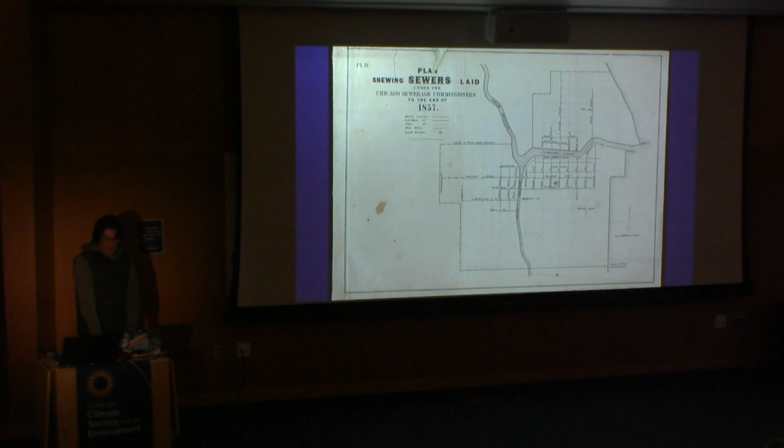In 1850, the population of Chicago had grown to over 28,000 people, more than 6 times its size just 10 years before, and this growth was rapidly increasing. So much so that the Chicago Board of Sewerage Commissioners deemed digging into Chicago's soils to install a network of pipes underground would be too expensive. There's a blueprint of the plans there in 1857.

At the time, they concluded that building a sewage and stormwater piping network above ground would be most practical. This engineered system would then let gravity carry sewage and stormwater from the city to the Chicago River. They then raised the city's elevation to sit above the new pipes. The plan? They dredged the Chicago River and used the fill to raise the city 10 feet. The challenge then was to raise the city's existing buildings to meet that new elevation.

They used an engineering method or practice called the Pullman method, which is exactly how it sounds. They would place the foundation of a given building on jacks that would then be turned in unison, slowly raising those buildings. So you'd look out your window in Chicago in 1855 and you'd see upwards of 600 men each turning their jacks a quarter of a turn at the blow of a whistle. Soon enough, the city was 10 feet higher and the streets were much drier.

But as Chicago grew, so did the water problems. By the late 19th century, rain events were bringing more pollution than ever to the Chicago River, and Lake Michigan's water quality was deteriorating. So the Chicago Board of Sewerage Commissioners put their engineering hats on again, this time developing a plan to reverse the Chicago River and send the city's raw sewage and stormwater south, in what eventually would become drainage to the Mississippi River.

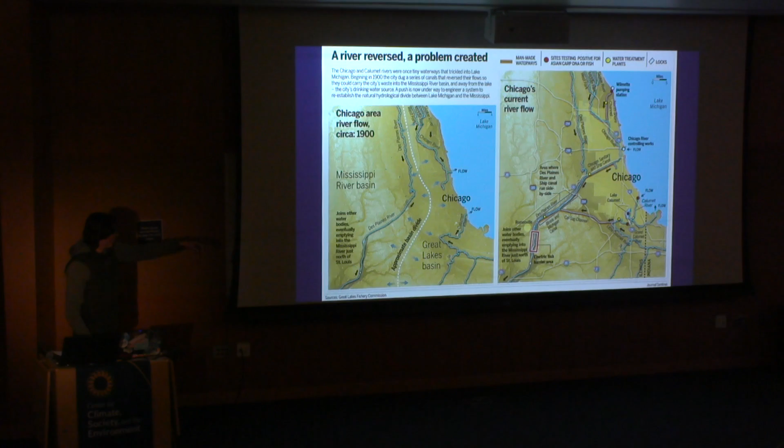As you can see there, the water flow on the left flowed into Lake Michigan. You have your approximate continental divide, and they trenched all the way down to the Des Plaines River there. Quite wild.

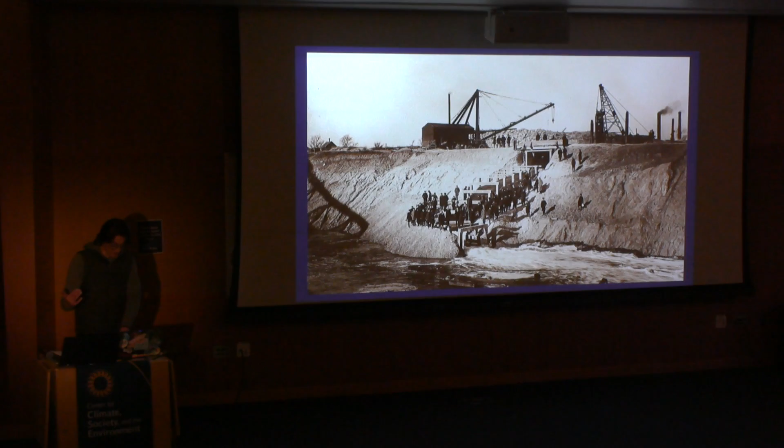In 1892, the Big Ditch, as the project was referred to, began construction. Thousands of laborers used new inventions like the steam shovel and dynamite to excavate 42 million tons of rock and soil to redirect the Chicago River's flow from Lake Michigan to the Mississippi.

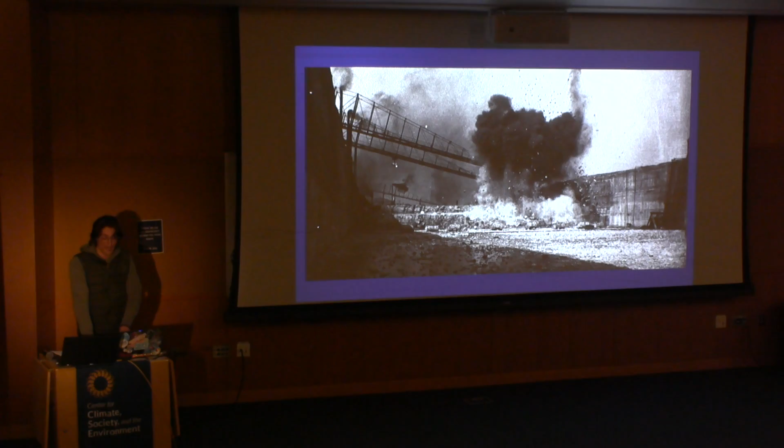Understandably, downstream communities were not happy with the resulting pollution. So the city of Chicago ran propaganda promoting the engineered project as safe, with slogans such as, "The solution to pollution is dilution," stating that the purifying qualities of Lake Michigan would make that water safe. Chicago knew they had to finish the project before they faced downstream lawsuits. And on January 1st, 1900, the city completed its final dig at the end of the project site, forever redirecting the flow of the Chicago River from Lake Michigan to the Mississippi, ultimately saving the city's main source of drinking water while preventing catastrophic flooding.

I'd now like to forward us to the Clean Water Act of 1972. The federal government made clear the need to focus on regulating the discharge of sewage and stormwater from cities' underground piping into main bodies of water.

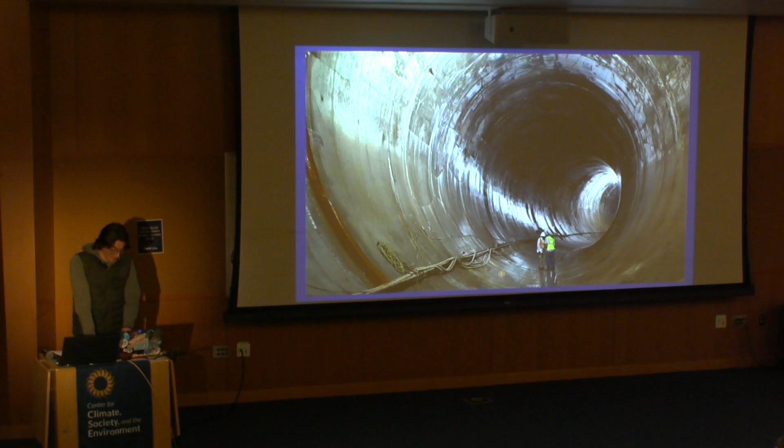The new mandates led city engineers to think big again, as the water pollution problem had become one of the worst in the nation, as Chicago had now grown to over 3.3 million people, making it the second largest city in the US and 10th in the world. Chicago embarked on one of the nation's most ambitious and expensive infrastructure projects to date: the Tunnel and Reservoir Project, also known as the Deep Tunnel, a massive storage system that will be able to hold 20 billion gallons of water once completed.

This project was signed into action in 1972 and is set to be finished in 2029, making this a 57-year project that has yet to be completed.

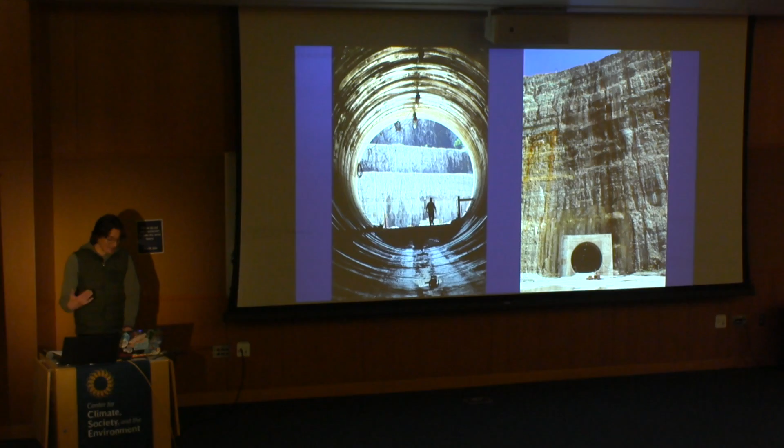The solution made sense at the time because Chicago's sewage still functioned within that same combined system developed by the Chicago Board of Sewerage Commissioners, a combination of sewage and stormwater pipes underneath the city.

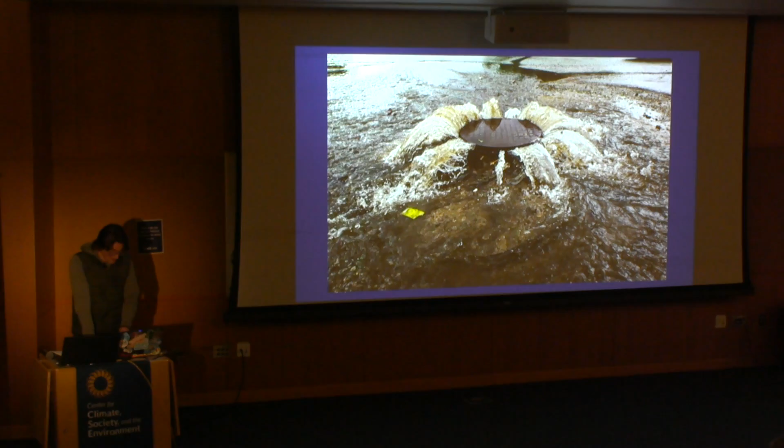Currently, just 1 to 2 inches of rainfall can overwhelm this network, forcing sewage back through the pipes to where it came from. When this happens, a combination of sewage and stormwater flows into city streets and residents' basements in what we know as urban flooding.

If there is still too much strain on the system, the city opens its floodgates, once again pouring a mixture of sewage and street runoff into local sources like the Chicago River and Lake Michigan, which is still the city's main source of drinking water.

So you have 49 years later, 9 mayors and more than $4 billion invested after the Deep Tunnel project was commissioned, and urban flooding continues to plague residents, particularly in Chicago's disadvantaged communities. Some experts now say it's time for a new approach.

Today, the Deep Tunnel project is facing issues just like Chicago's big engineering ideas of the past. This time, however, climate change is impacting the engineered design of the project.

When completed, the Deep Tunnel will consist of 109 miles of underground tunnels and 3 reservoirs that will take on stormwater and sewage during heavy rain events.

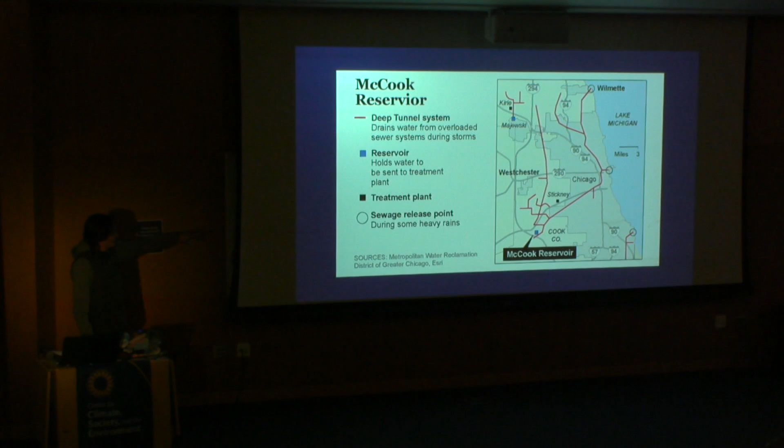So you have 3 release points here, and I'd just like to note the sewage release points during some heavy rain events. They're in the Wilmette, the Chicago, and there's a third one further south.

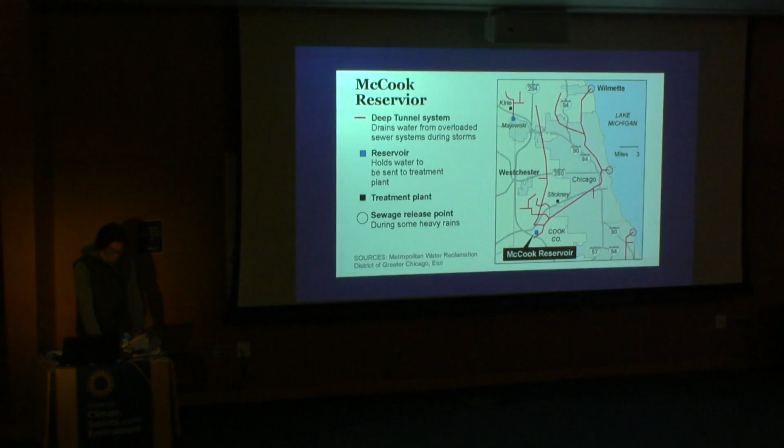Today, the Deep Tunnel is far from resolving localized flooding problems. The lead engineers of today have stated that the issue is now not a capacity problem, but rather a restriction problem, meaning that the piping infrastructure underneath the city is not able to handle the sheer volume of these new storm events in the era of climate change.

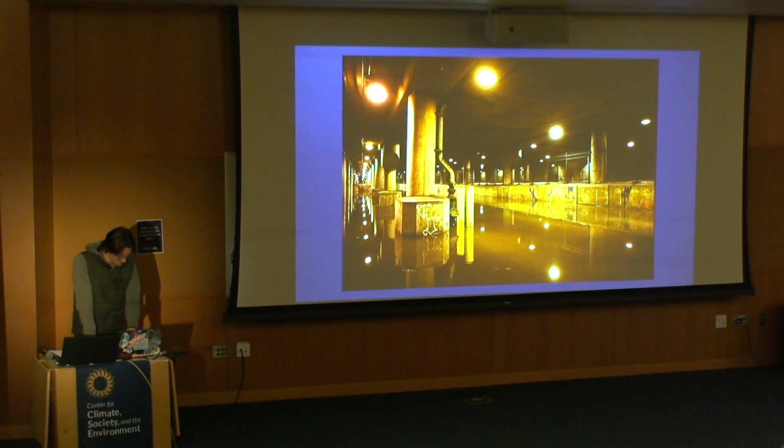One engineer has compared the deep tunnel system to a bathtub. If you don't have enough big straws to get to the bathtub, it doesn't matter how big the bathtub is. So stormwater simply can't drain into the deep tunnel system fast enough in certain areas of the Chicago community.

The city is now encouraging engineered designs that focus on concepts that embrace what is known as green infrastructure, a concept that I will describe here in a moment.

Our second water story is centered around the city of Los Angeles. In 1862, Southern California was already very naturally wet: marshes, ponds, pools, dunes, meadows, and thickets. It was evident the impact water had on the physical layout of the region.

However, the year also marks the Great Flood of 1862. When the state of California was just 12 years old, a storm lasting 43 days dropped 10 feet of rain on the entire state, flooding entire cities for months at a time. This occurred from what is called an atmospheric river.

I'm glad I got some laughs out of that one, as I'm sure a lot of you are familiar given the recent news down in California.

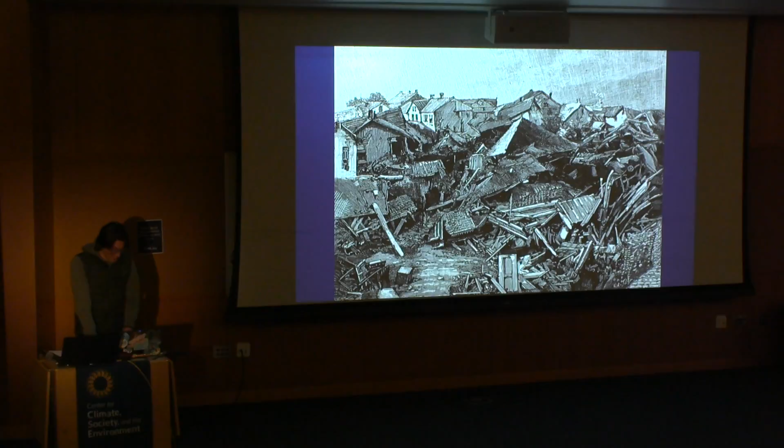This was essentially a 43-day river flowing over the state, dropping a water bomb which destroyed a fourth of the state's properties. The storm forever changed the state, which archived a disaster plan created by the United States Geological Survey in preparation for the next storm.

They even have a name for that next big storm, ARKSTORM. The Great Flood of 1862 is pronounced to be the worst disaster to ever strike the state of California.

Given this event, it's no wonder the ecological footprint of the land in California began to rapidly change not soon after. Water could be of no greater inconvenience to the citizens who inhabited the land at a period that just so happens to mark the beginning of the Second Industrial Revolution in North America.

New ways of doing, tremendous opportunities for economic development, a rapid shift in urbanization were all merging in one time period. The think-big engineering practices, similar to that of Chicago, were generating a paradigm shift in thought as to what life would look like in our cities.

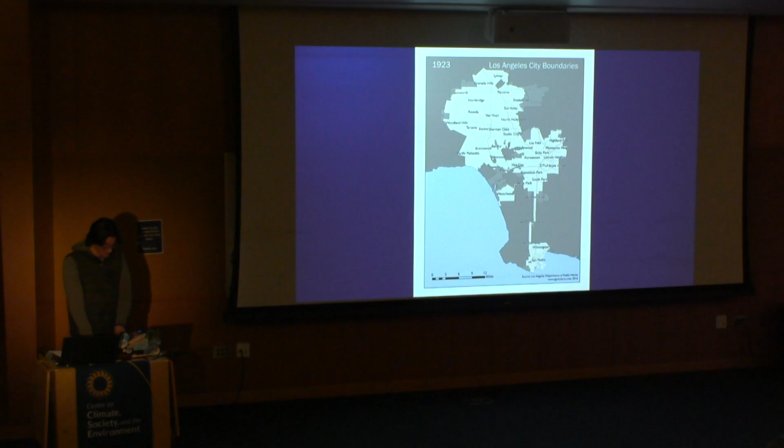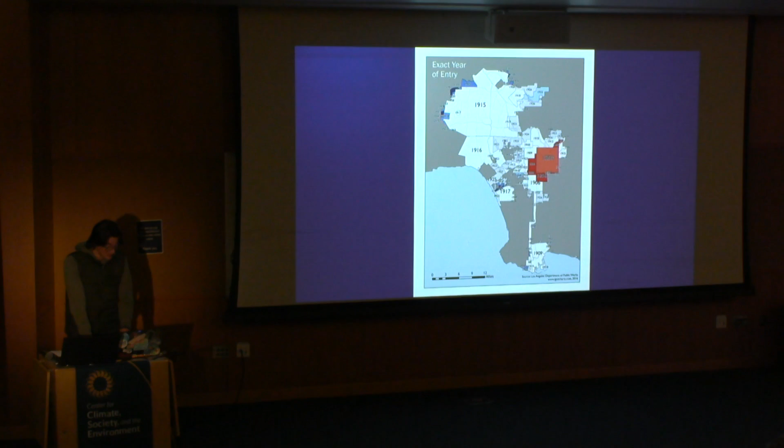Over the next century, Californians continued to expand the LA basin, and along with it, the grading of streets. As we are all familiar with now, a network of underground storm pipes followed to get water away from structures as quickly as possible. The interruption of LA's natural environment is vast, a term that can also be used to describe the amount of impervious surface laid down in the Los Angeles basin.

LA quickly became an asphalt and concrete jungle of sorts. In fact, the river itself is now concrete.

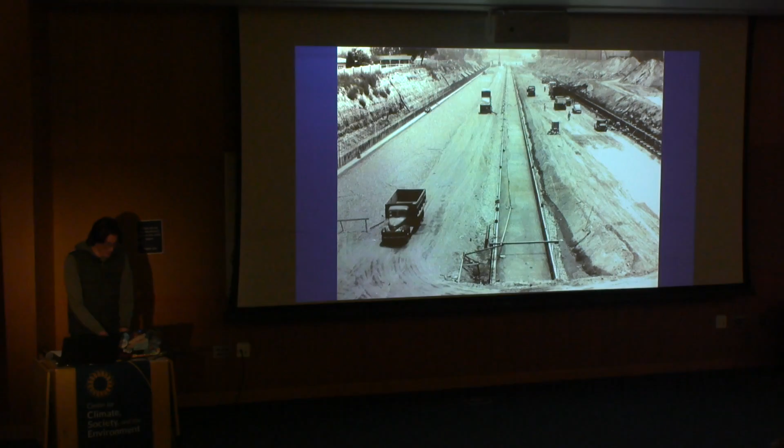A second catastrophic flood in 1938 brought more rain to the city of LA in one day than it usually does in an entire year. This wiped out bridges along the LA River and destroyed over 1,500 homes, forcing engineers to rethink the physical layout of the river itself.

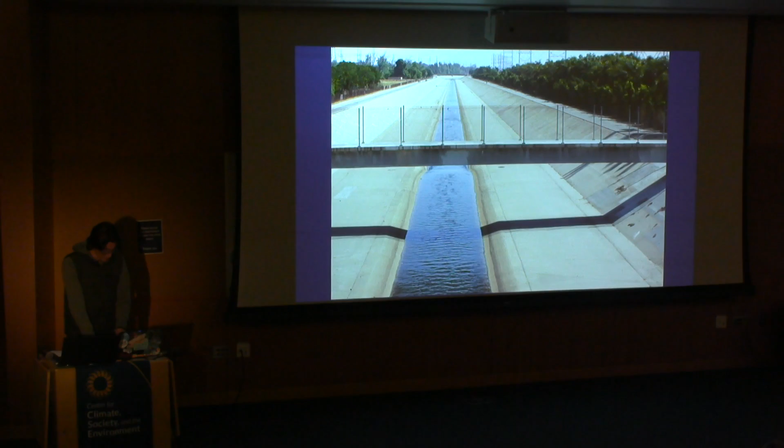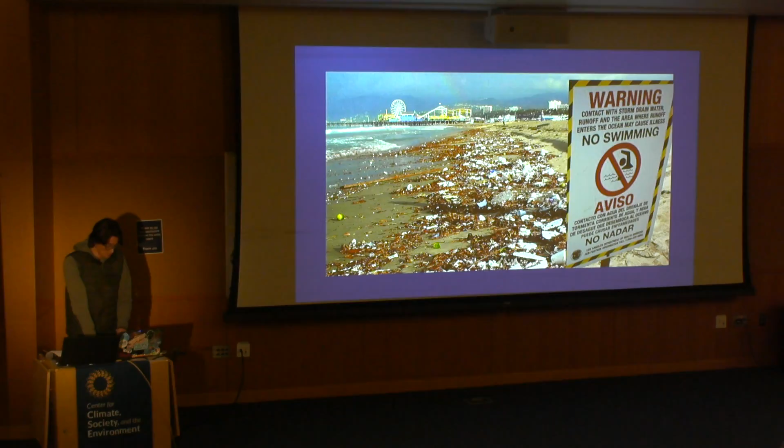Over the next 30-year period following that storm, over 3.5 million barrels of concrete were poured into the river channel, transforming the natural water body from a river into a man-made flood control channel. Some estimate that an average of 60% of LA County watersheds are now paved over, including the rivers themselves. When rain hits Los Angeles today, stormwater is channeled to the city's over 2,000 storm drains and flows directly into that same concrete river. The stormwater is then pushed out through gravity to the Pacific Ocean as quickly as possible. The freshwater asset is gone before it came, at a time when drought plagues the LA basin.

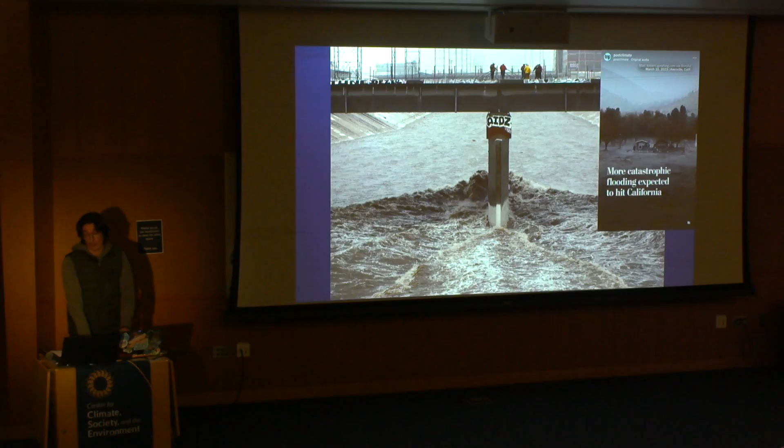Just like many cities across the West, climate change isn't necessarily changing the overall volume of rainfall quite yet. What is changing, rather, is the increased intensity of storms and when they occur. In places like Los Angeles, we often hear about the impact of drought. However, of equal significance is the record rainfall and flood events that occur during winter months, similar to the over 5 inches of rain that fell on downtown LA in December of 2021, breaking a previous daily record set in 1888. This year's winter season has been equally as dramatic.

Flooding and pollution issues still exist in a time of considerable drought. Now, I will say that recent storms have increased some reservoirs in LA by up to 81% this year, so that's very valuable for the state of California.

According to the Environmental Protection Agency, an estimated 10 trillion gallons of untreated stormwater runoff containing raw sewage, fertilizer, oil, pesticides, bacteria, and other pollutants enter U.S. streams, rivers, and oceans annually from sewer systems, polluting the environment and drinking water supplies.

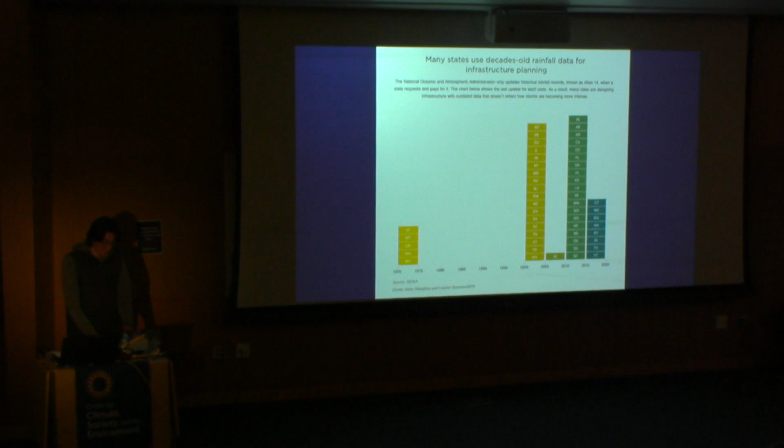In the broad scope, many of the infrastructure issues facing our nation can be traced back to the quantitative misrepresentation of what water industry professionals call the 100-year design storm metric. This refers to infrastructure engineered to withstand storms expected to occur once every 100 years. The issue with this data is it's not only outdated, but does not take into account a changing climate as weather patterns become more unpredictable.

For example, you now hear about cities like Chicago experiencing 500-year storm events. Infrastructure in 43 states is currently designed with data collected no later than 2015. As depicted, rainfall records representing industry design storm criteria in the Pacific Northwest date all the way back to 1973. These issues will continue to accelerate, supposing that NOAA, the National Oceanic and Atmospheric Administration's Atlas 14 report, continues to provide data representative of the past and not the future.

Even with the most up-to-date rainfall information, climate scientists warn that infrastructure is still likely to fail. Amending this infrastructure data is the first step in the right direction. Now, I promise there is hope.

I'm going to take a second to grab a drink, and then we'll get into the fun stuff.

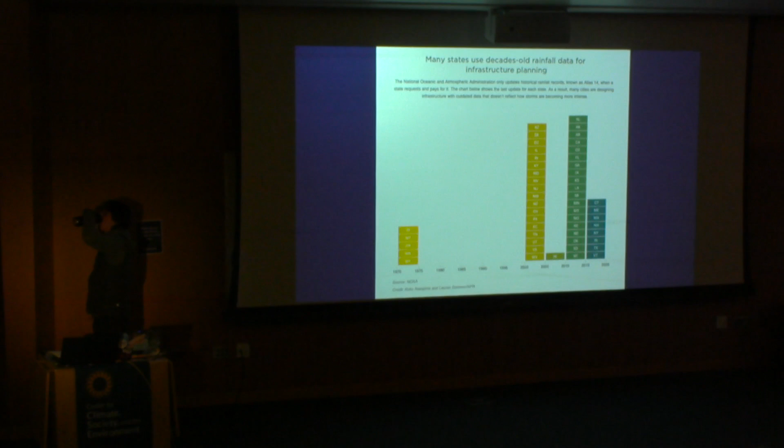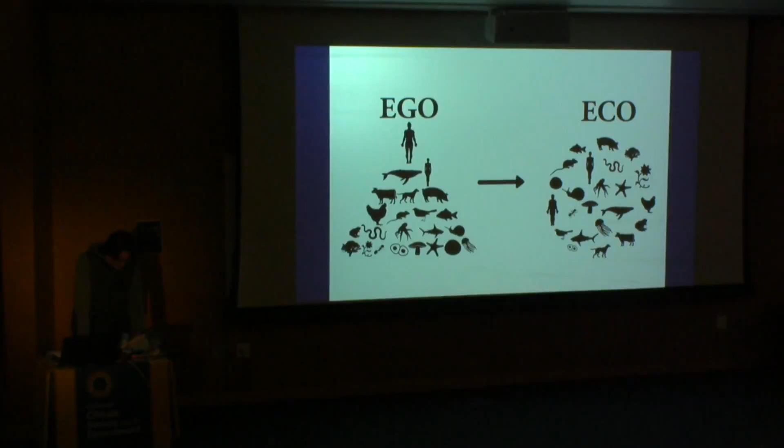So how do we overcome these major challenges? The opportunity we see begins with a thought change, similar to that experienced by those who lived at the beginning of the second industrial revolution. The difference, however, is that the engineering practices of the past were most predominantly that of the anthropocentric, or human-centered focus. As Cardinal Czerny spoke about in Caring for Our Common Home in This World with This Climate, one of humanity's greatest flaws is the belief that we can engineer everything to fit the human paradigm, and this is simply misguided practice.

Previous revolutions have taught us that thought change has happened before, and I'm here to tell you that this is hope for the future. We now have the opportunity to see ourselves, the human race, as functional beings within an ecosystem that is not independent, but rather interconnected to our surrounding environment. This is also known as ecocentrism. We have an opportunity to build 21st century eco-centric infrastructure.

Yes, this does include dense urban areas, and sure, we will rely on new engineering practices and the adoption of technology to reconnect our cities back to their natural environment. The good news is that our nation will be investing more into infrastructure in the next two decades than at any point in human history, as we again face this changing climate. Building an ecocentric society can take us to places we have yet to comprehend, and I will stand in front of you today and say that I truly, truly believe that.

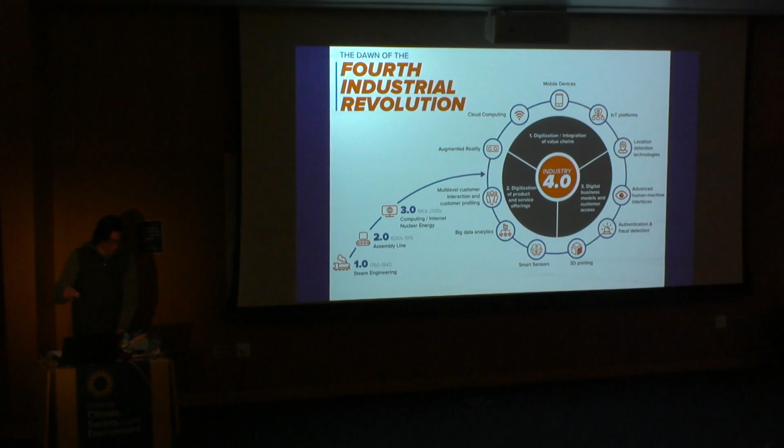Rather than focusing on the 2nd industrial practices of assembly lines and electrification, now we have the opportunity to build physical infrastructure within cyber-physical systems, which are now and will continue to be a point of focus not just today for our team, but for companies and concepts all around the world. The 4th Industrial Revolution runs far beyond robotics, self-driving cars, and implantable medical devices. We can also use practices in artificial intelligence, the Internet of Things, amongst others, to advance our physical infrastructure system.

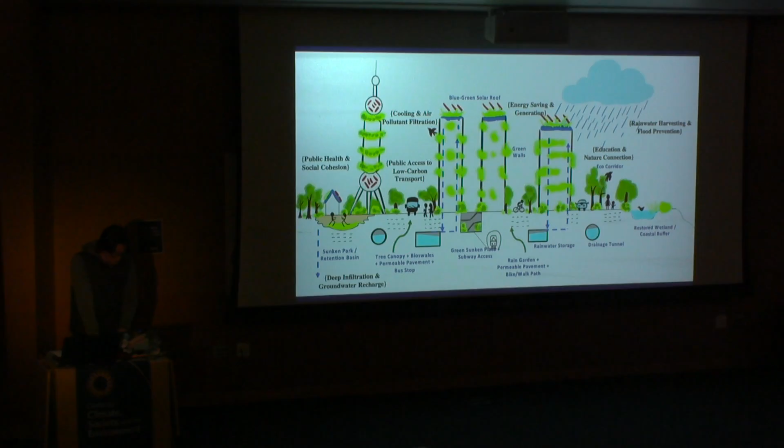And this green revolution is currently underway. Although subtle, cities across the nation are focusing on a concept known as green infrastructure to meet their stormwater consent decrees. Broadly put, green infrastructure refers to keeping the raindrops where they fall, rather than running off to curb lines and into gutters at the end of the street. Green infrastructure collects this stormwater and infiltrates it back into the ground, reconnecting the precious asset back into the natural water cycle. Forms of green infrastructure include the planting of trees, restoring wetlands, and installing permeable materials rather than building additional underground piping and costly new centralized water treatment plants.

Cities like Chicago and Los Angeles are placing concerted effort into expanding these practices on the ground at present time. However, green infrastructure has experienced sparse innovation since the exploratory phases of the market in the early 90s and 2000s due to lack of reliability of maintenance, along with the cost of interrupting underground utility upon its installation.

And this is where our innovation stack comes into light. Starting in 2015, our team has placed concerted effort in developing our design concepts in order to advance that green infrastructure toolkit. The question we ask ourselves is, how can we provide developers with the best possible design to adapt for success in a changing climate?

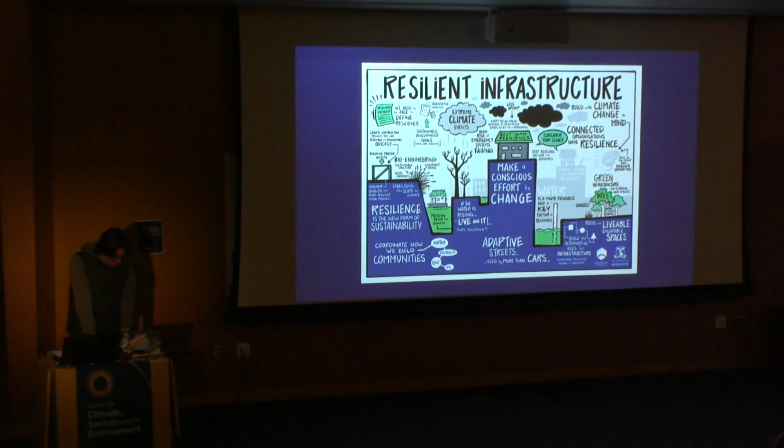We realize that resilient infrastructure is imperative for cities to achieve and maintain their water goals. And in order to adapt for success, cities should be given the opportunity to tackle the myriad of infrastructure problems, in a retrofit design that is easy to install and maintain, is cost-effective, and embraces the ecological, technological design approach for long-term resilience and utility management.

The question became this: can we impact improvements in transportation, broadband, energy, and ecology while implementing an innovative solution to the stormwater issue at hand?

We see the opportunity zone in optimizing the sidewalk. In the first half of the 20th century, the federal government focused on accommodating automobiles by shrinking sidewalks, while newer cities deprioritized pedestrian infrastructure. For example, an estimated 4,600 miles of sidewalk in Los Angeles are considered damaged. A recent study also indicates that 3 out of 5 scooter accidents occur at the sidewalk. Lastly, disadvantaged communities are again predominantly impacted by deteriorating sidewalks.

We thought, why can't sidewalks themselves be permeable or able to capture that rainwater, rather than relying on the curb line to direct stormwater into gutters and into pipes?

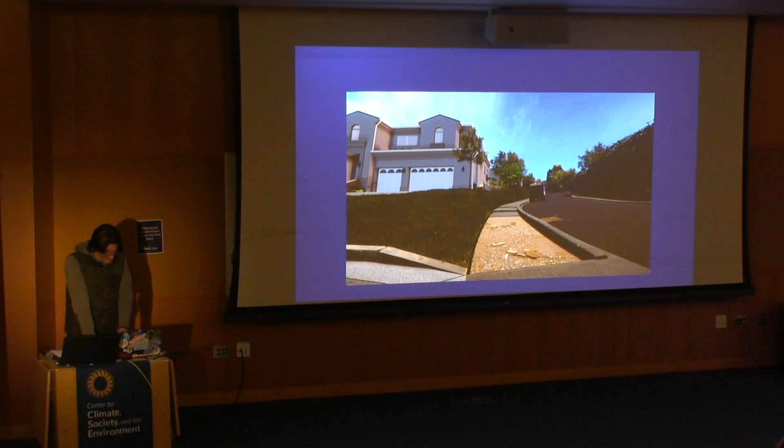Our patented retrofit design modernizes the sidewalk while encouraging complete street concepts and calming transportation. By eliminating the existing curb line and relying on the sidewalk itself to manage runoff from the street, we can drastically reduce the overall volume of stormwater managed by existing stormwater systems, while providing an opportunity to upgrade the necessary above-ground infrastructure to increase safety for electric vehicle and pedestrian traffic.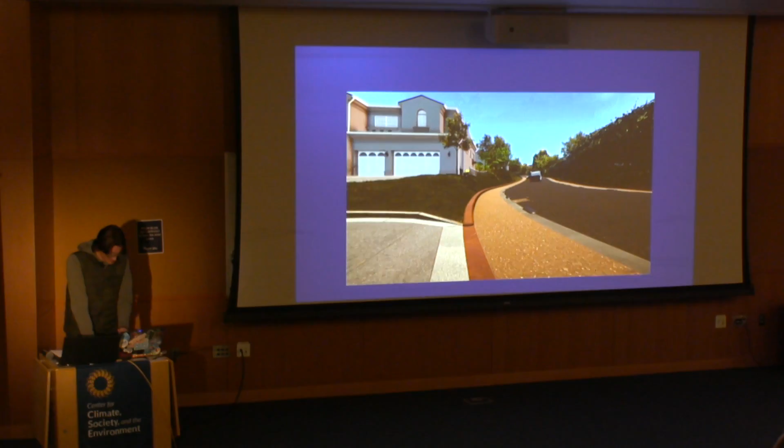Precast sidewalk panels made with our permeable material technology will then be installed atop an engineered design that provides developers with an increased ability to connect stormwater back into the underlying soil, and again, that natural water cycle. We've made significant progress on improving the maintenance behind traditional permeable pavement by developing a technology that utilizes microscopic pores that have demonstrated a resistance to clogging at the surface.

This would then provide opportunity for improved maintenance by allowing communities to clean green infrastructure at the sidewalk while using existing street sweep equipment. We would not want to reinvent the wheel here.

I will further describe the permeable material technology here shortly, but first I will demonstrate the distributed utility system upon which this material will be installed.

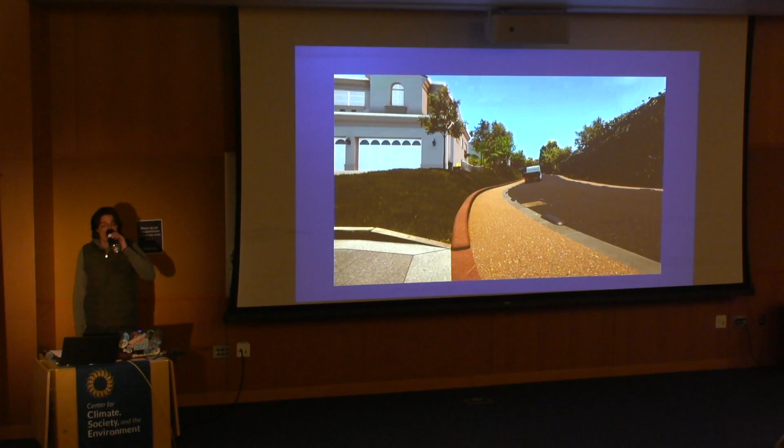Now, let's take ourselves underground for a moment. Figure 3 illustrates a side section view of an improved sidewalk.

124 and 126 represent our permeable material technology by way of our precast sidewalk panels. Again, when I say permeable, I am referring to a hard surface that allows water to pass through.

129 represents the static sump portion of our stormwater filtration system. Our static sumps are large-sized detention blocks that utilize technology similar to that of the sidewalk panels, as mentioned before, while obtaining increased permeability. These detention blocks are installed directly below the upgraded sidewalk panels and act as an engineered soil of sorts.

These detention tanks will be manufactured to infiltrate stormwater at a rate that coincides with the infiltration rate of the native soil in which it is installed upon.

It's important to note that we plan for the vast majority of the stormwater collected by this sidewalk system to naturally seep into the ground below, as again, I highlight the essential benefit of green infrastructure: keeping the raindrops where they fall.

Figure 4 illustrates a side section view of a dynamic sump, a hollow cistern of sorts that is installed throughout the sidewalk and at the lowest down gradient point of a given installation. In relation to retrofit designs, this will be located in close proximity to the street's existing catch basin.

Figure 10 is a side section view depicting how a series of static and dynamic sumps would work in cohesion with one another through a cascading arrangement.

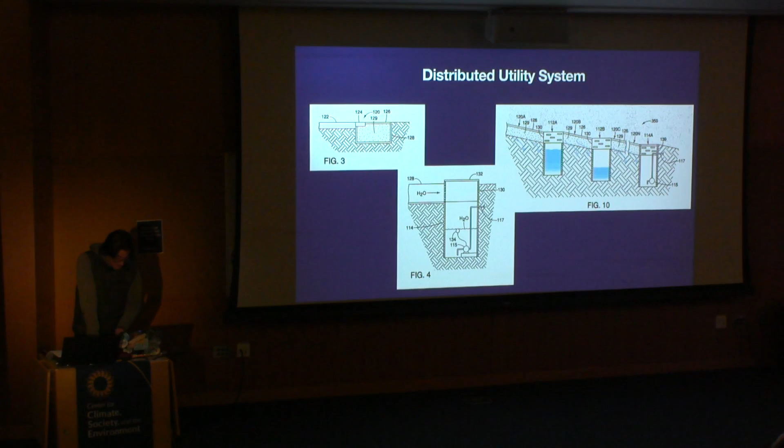Now imagine a city block in which our engineered design begins to take on an extraordinary rain event. The sidewalk panels and static sumps begin to saturate with stormwater, filling the dynamic sumps represented in 112A and 112B. With gravity, stormwater will eventually reach the lowest down gradient dynamic sump, which is represented again in figure 4.

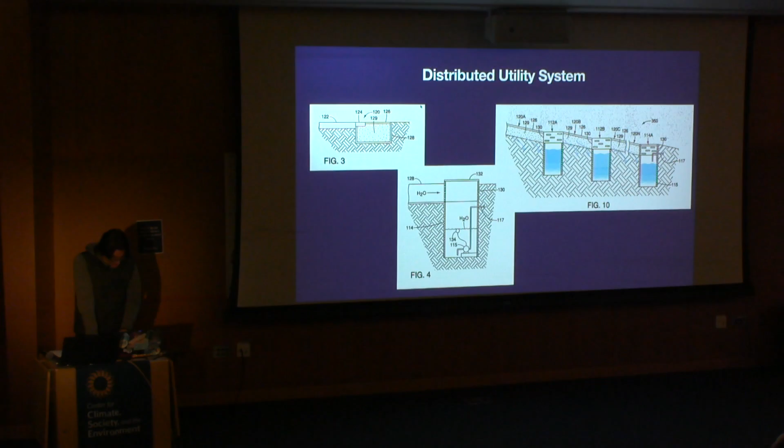Once an entire system within a city block reaches capacity, a float switch labeled in 134 of figure 4, equipped with LoRaWAN sensor capabilities, will inform a utility management control system that excess stormwater is in need of relocation.

A software program connected to the utility management control system will then relocate this stormwater based on the most up-to-date atmospheric conditions. A recent breakthrough in artificial intelligence enables software to determine rainfall 90 minutes before it occurs, thus providing an opportunity for our distributed utility system to be proactive rather than reactive to storms and extreme weather events.

A sump pump labeled in 115 of figure 4, in the lowest down gradient dynamic sump, discharges excess stormwater from the dynamic sump into a water discharge line, which is labeled in 117, for relocation of this stormwater.

Through this system, we plan to drastically reduce the overall volume of stormwater managed outside the location of which it falls, while opening the door for further innovation. Now, you may ask how this is done.

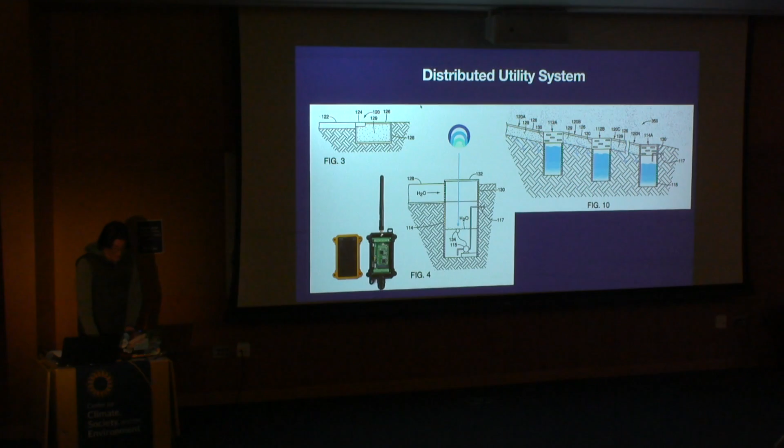Figure 13 displays a side sectional view of a large diameter stormwater pipe retrofitted to meet the needs of our distributed utility system. These stormwater pipes are an average of 3.5 feet in width.

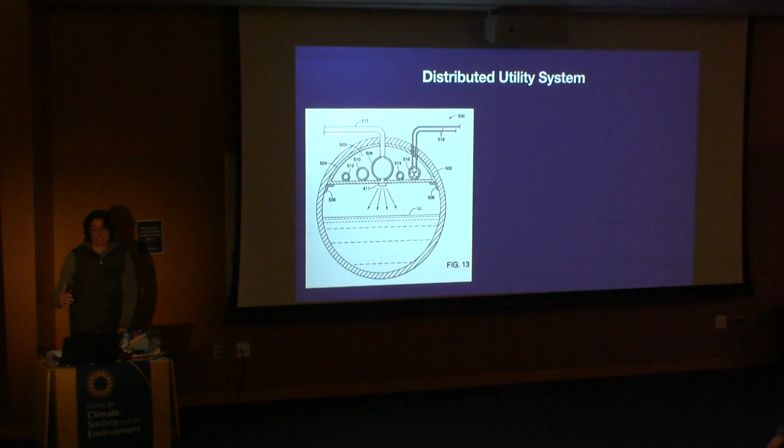By drastically reducing the overall volume of stormwater managed by existing gray infrastructure networks, we have the opportunity to utilize the roughly 3.5 million miles of piping underneath U.S. cities as real estate for what we call a utility housing corridor.

Non-intrusive, this design concept prevents the invasive construction methods associated with ripping up streets and replacing gray infrastructure and utility. A patented corridor includes electrical power lines, telecommunication or broadband utility lines, as well as the stormwater discharge line mentioned in the previous slide.

The corridor will be manufactured from a flexible material to facilitate installation into pre-existing large diameter utility lines. Installation of the housing corridor can be accessed through pre-existing manhole covers that occur at roughly every 400 feet of pavement.

The interior of the utility housing corridor can be filled with a setting foam, such as an expanding polyurethane sealant, to prevent fluids, gases, and electrical signals from being conducted from one utility line to the other, as well as provide thermal insulation for fluids within the smaller diameter utility line.

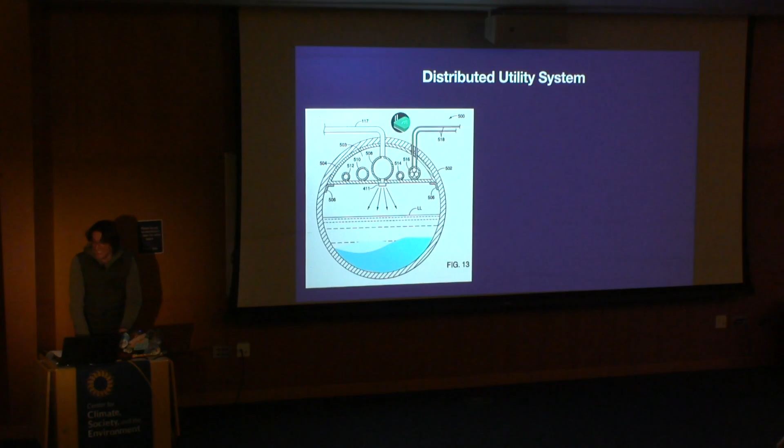So where does this water go? The plan view diagram depicted in Figure 9 provides an example of how this system would be applied over a large geographical area. 302 represents an urban core, while 304 represents a rural area.

As previously addressed, high-density urban cores are characterized by high amounts of impervious surface and sometimes have minimal opportunity for natural drainage, while rural areas provide more flexibility for various types of infiltration.

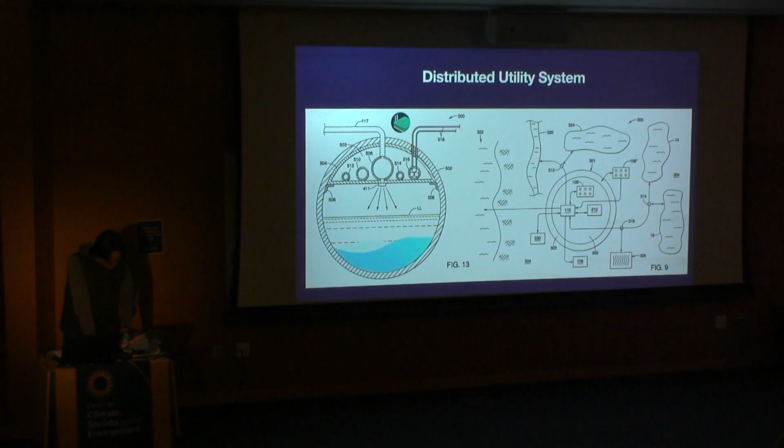Each distributed utility system would operate through a water management control system discussed previously and represented in 110. Manifolds best appropriating water resources and destinations based on current atmospheric conditions would be noted. Additional treatment of water from stormwater discharge lines may be appropriate, as represented in 210, utilizing the 2.5 million current stormwater treatment assets across the U.S., which would also be integrated into this design.

The utility housing corridor also represents and includes telecommunication utility lines. This is intended to address issues surrounding fifth generation cell data technology. 5G operates at a much higher radio frequency than previous generations—24 to 52 gigahertz—and this frequency has difficulty traveling long distances, whereas 4G is able to travel from antenna to antenna over the course of miles.

5G signals typically travel no greater than 1,000 to 1,500 feet. 5G also operates in smaller cells compared to previous generations, meaning more users in a given area impact the range 5G can serve. Studies also indicate 5G has trouble passing through some walls and windows and around corners of buildings, and can be disrupted by atmospheric conditions, all of which continue to impact the performance and reliability of 5G telecommunication lines, especially in dense urban areas.

Figure 15 is a plan view depicting how our distributed utility system can be implemented as part of a telecommunication system. The arrow indicates our sidewalk retrofit. This is again an above-ground aerial view. S1 and S2 depict two intersecting streets.

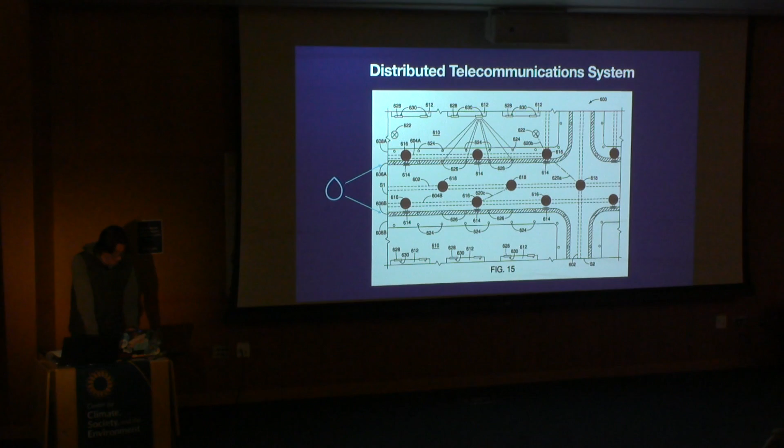The figures at 616 and 618 represent the existing manhole covers, which provide access points for installation of the utility housing corridor. Once installed, optical fiber cables would enable cities with the capacity to transmit 5G cellular signals at an estimated high bandwidth of 10 gigabits per second.

Since optical fiber needs to be transmitted to an antenna for wireless transmission, installing antennas on utility poles located inside the manhole access point provides frequent and reliable transmission of high bandwidth telecom. This can be installed at the same time as the utility housing unit.

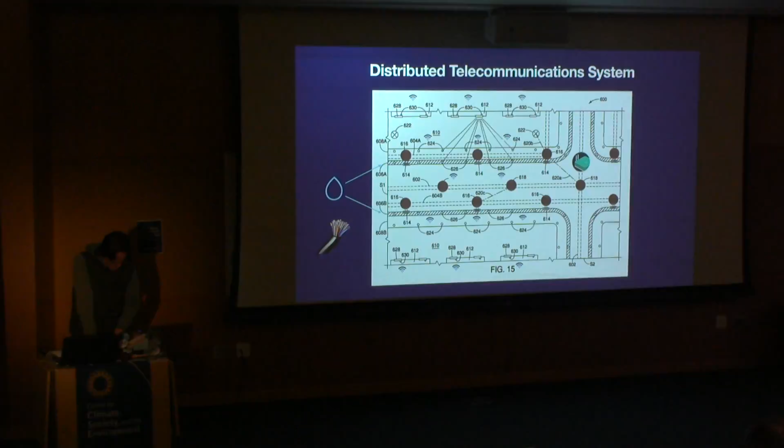Wireless repeaters installed within our sidewalk provide 5G and future telecom systems with the capability of increasing cell size while providing reliable wireless connectivity. These repeaters can be placed every 50 feet or less, enabling a trusted network for pedestrians and passing commuters. As part of our design concept, prefabricated repeater units will be engineered into the retrofit design in order to easily maintain repeaters and enable access for future generation telecom. These repeater units lead us to the final feature of our distributed utility system.

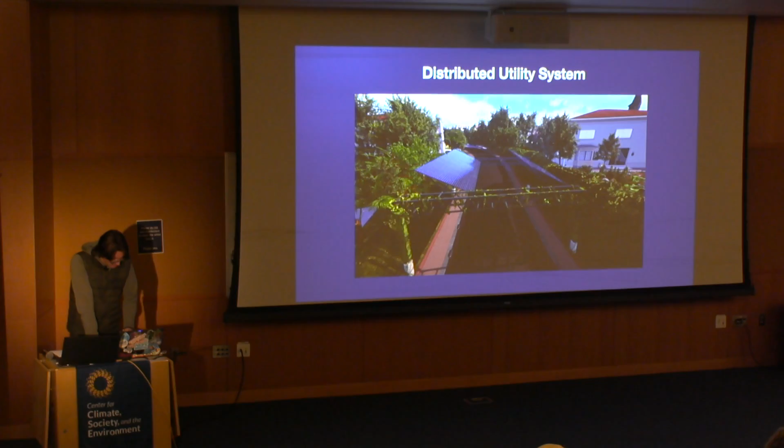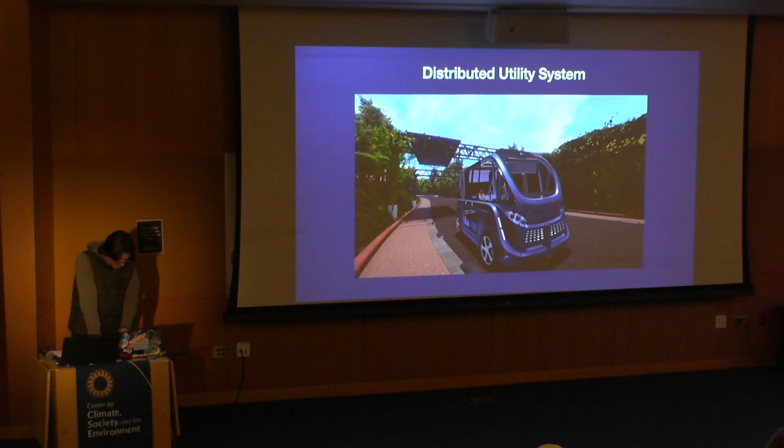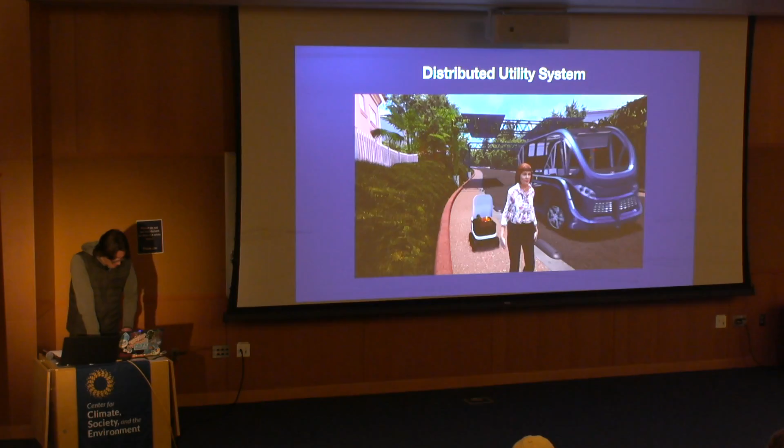Now we'll go back above ground here. Our prefabricated repeater units, although varied in size, design, and frequency of installation within the design concept, provide installers with the capacity of storing power. Photovoltaic solar cells using bifacial solar panels will connect the energy utility line with the housing corridor. This line will then connect to capacitors within the prefabricated repeater units. Reliable 5G connectivity and renewable energy is critical in developing the smart cities of the future.

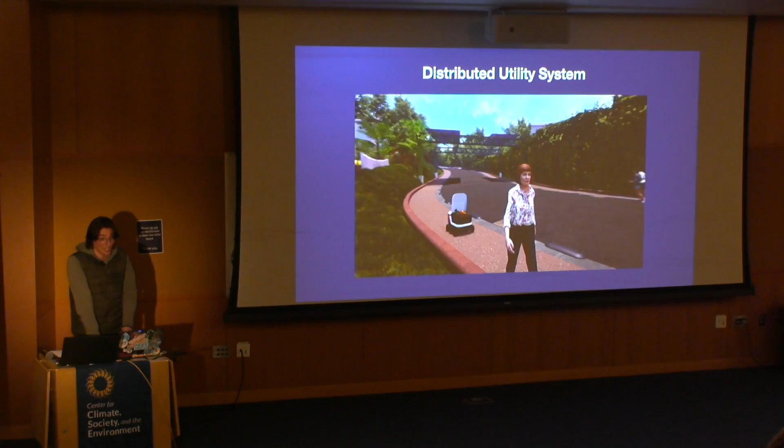As we head more in the direction of autonomous vehicles, building infrastructure that embraces the technological built environment is absolutely critical. We believe this starts with rethinking utility at its foundation.

To assist in the ecological, technological evolution of green infrastructure, we strive to plant nature's footprint back into our communities whenever possible, alongside our upgraded sidewalks, in collaboration with community nonprofits who are already doing this work. A great example would be organizations similar to the Spokane Lands Council, who developed a Spokanopy program intended to plant trees in Spokane's disadvantaged communities to improve air quality and prevent the urban heat island effect Dr. Henning talks about so often. These types of partnerships can deepen our ecological footprint while installing the distributed utility system.

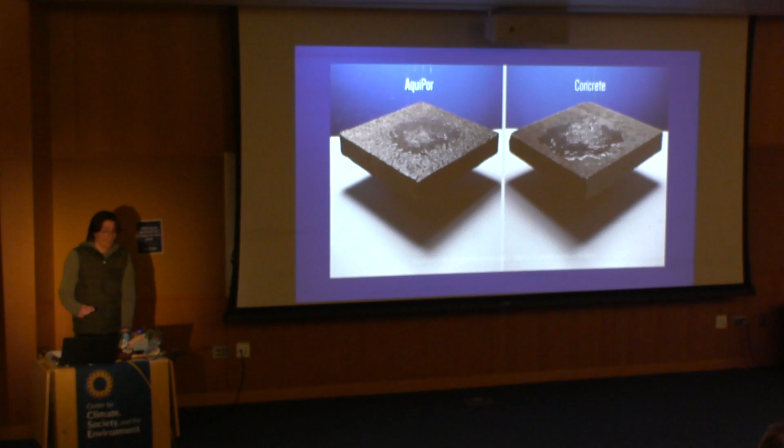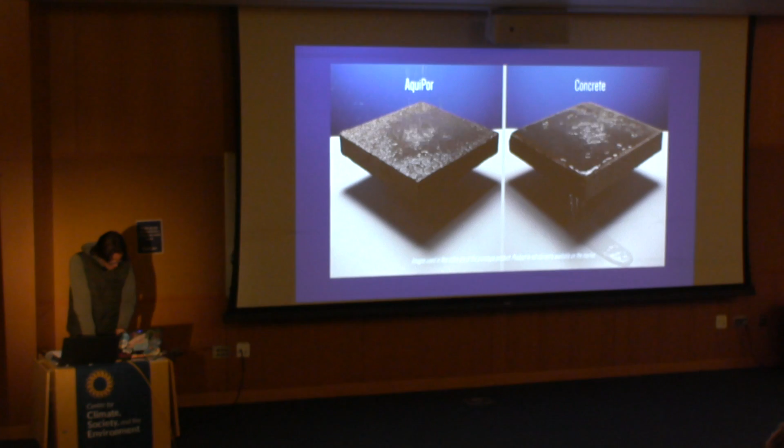As noted before, the potential for our distributed utility system begins at the sidewalk with the installation of our permeable material technology. Since the early 90s, permeable pavement has been used in limited application to promote infiltration of stormwater through hard surfaces into the native soil. For years, however, we've heard from industry professionals that this technology is great in theory, but in practice will fill and clog with sediment over time, limiting its infiltration capacity.

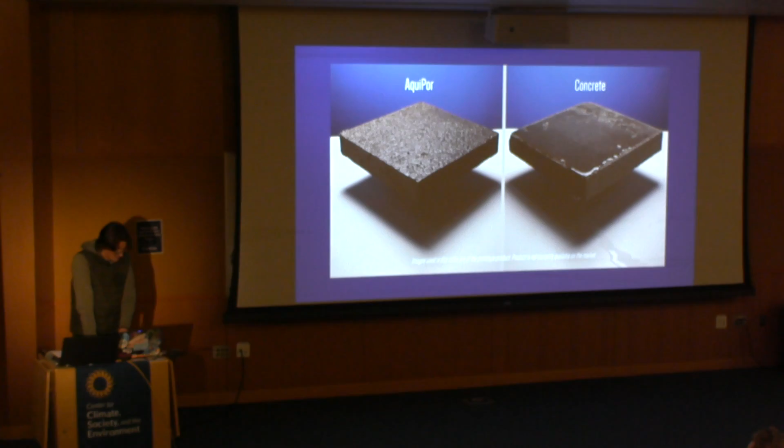By increasing the pore size and frequency of pore size in permeable pavement, we've developed a technology that has demonstrated resistance to clogging. This material technology is precast into place, similar to precast concrete, while utilizing a patented binding agent that functions without the use of Portland-based cement. That's a huge factor—some of you may know CO2 in concrete; concrete is one of the largest emitters of CO2 on the planet. Our research and development indicates this binding agent is potentially compatible with upcycled materials, supporting a business model that adheres to industrial symbiosis or closed circle economics. We want to use waste to build this sidewalk material.

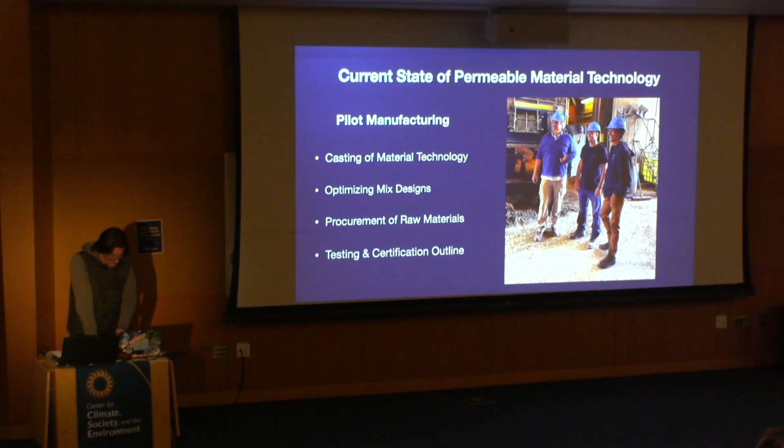Our team is currently in the pilot manufacturing stage of progressing this material technology into commercialization. Located at Spilker Precast, locally here in Spokane, our team has spent the last two years optimizing various mix designs to be compatible with precast manufacturing processes. This includes the procurement of raw materials in conjunction with our evolving mix designs.

Lastly, we have outlined formal testing and certification for this material technology. This testing will be in conjunction with the Department of Ecology's Technology Assessment Protocol, or TAPE certification. This program presents a gateway for national recognition of the permeable material technology, and ultimately the distributed utility system, as stormwater policy—which I've closely followed for the last five years—continues to evolve.

It's important to note that our engineering, procurement, and construction management model is in many ways in its infancy. Our team focuses now on optimization of our permeable material technology, aligning the procurement of materials, allocating agreements with existing precast manufacturers, and exploring opportunities with third-party engineers. This is just to name a few.

Having said that, we recognize that collaboration now is key to our success, and we are working diligently to meet the needs of pilot project opportunities all over the nation, but especially down in the LA basin.

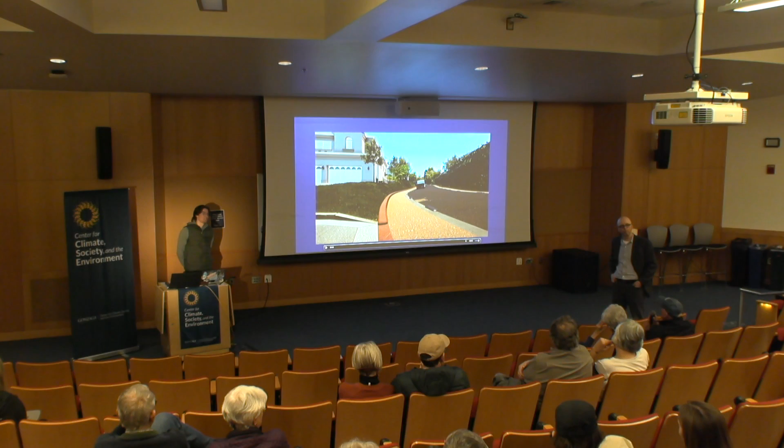I was just wondering, is there a way to repurpose the existing sidewalk material to make them porous?

That's a great question. So the question is, can you use the existing material in your sidewalks and recycle it to make permeable material? It really depends on the aggregate type used. It's something we've looked into and are seeing if it's possible. They actually already recycle existing sidewalks that get replaced, so that's built into our cost model.

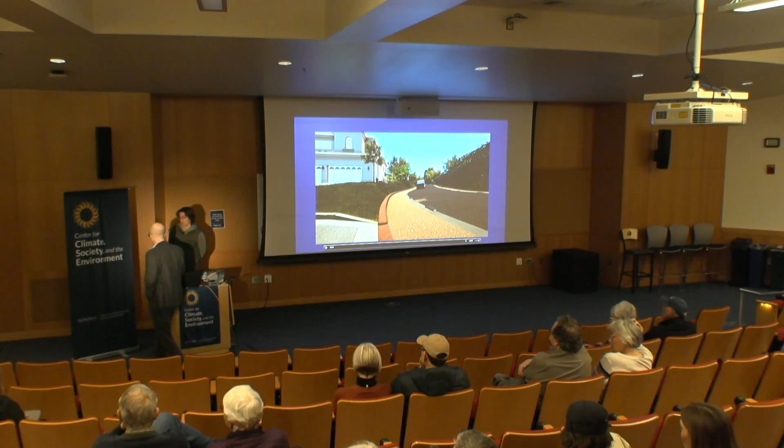Connect the climate dots again a little bit. You mentioned briefly that the total volume of water over the course of the year may not change immediately. So if you get 5 inches a year, you're probably still going to get 5 inches, but you're going to get it in fewer, larger storms. That seems to be the pattern.

So more moisture in the air, and resilient infrastructure would be able to handle larger, more infrequent storms. Is that part of the idea? Correct.

It's a plethora of solutions. We're not a one-fit-all solution, but we want to work with centralized water utility infrastructure, and our goal is to lessen the burden on those existing systems. That's really the concept. And to your point, California gets most of its rainfall in a 1 to 2 month period, and the rest is drought. So resilience means the ability to recover more quickly from these storms, and that's really where this tech falls.

So what would you say is the biggest impediment for a community like Spokane to do something like this? If you were to figure out the main impediment you're trying to overcome right now, is it technological or something else?

We've talked to the city about this concept. There is a stigma behind green infrastructure, or existing green infrastructure - that's the bioswales or big dips of grass you see. The city's tried what I call traditional permeable pavement methods, where the void space is large, but 5 to 10 years after the project's installed, it's deteriorating or clogged. So there's a bit of pushback, or some fear, behind installing a new system.